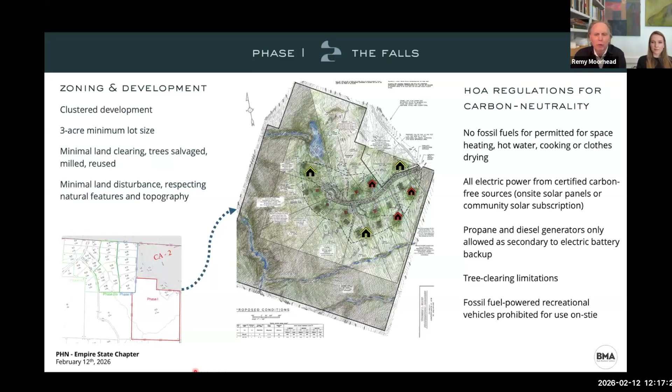Guiding principles for development of the land include retention of trees wherever possible and salvaging those trees, which need to be culled, for reuse wherever possible. The HOA establishes environmental mandates as well: no fossil fuels for heating, hot water, cooking, clothes drying, or recreation vehicles. All electric power, either solar or community solar subscription, and strict limits on tree clearing.

Early in project concept development, panelized construction was identified as a strong execution fit from a replicability and quality control standpoint. We are proud to have partnered with Bensonwood for these first 6 builds. The parameters of their system had a meaningful influence on our design process. We studied their plans and typical wall and roof sections to understand the kit of parts which would drive our designs. We developed new plans, sections, and elevations that worked within those parameters while reflecting our project design goals.

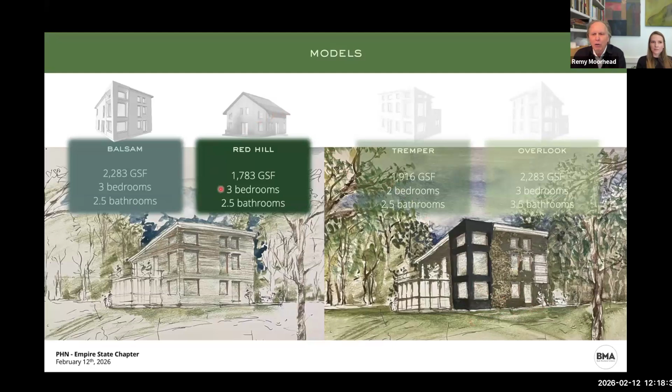Over the course of the project, we have designed 4 total models, all under 2,300 square feet. The design prompt from the client was modern rustic. The balsam, the watercolor on the lower right, became our first build. We turned more toward a contemporary take on the vernacular farmhouse for our newest model, the Red Hill, second from the upper left.

This is the balsam. As noted, this was our first build, originally constructed as a model home. This has been certified by PHI as a Passive House low-energy building. The balsam is 2,300 gross square feet, south-oriented, utilizes integrated passive shading by way of a feature corner, plus fixed shading over south windows.

As a Zehnder Q350 ERV system, it was designed initially with a 1.5-ton single-zone Fujitsu air source heat pump. During construction, our duct pressurization test for this system was fine. However, at completion, after the chipboard install, our balancing test showed significant drop at CFM at several rooms below the design calcs, what we think might have been related to unexpected friction loss in the ducts. We subsequently added the 1.5-ton supplemental unit.

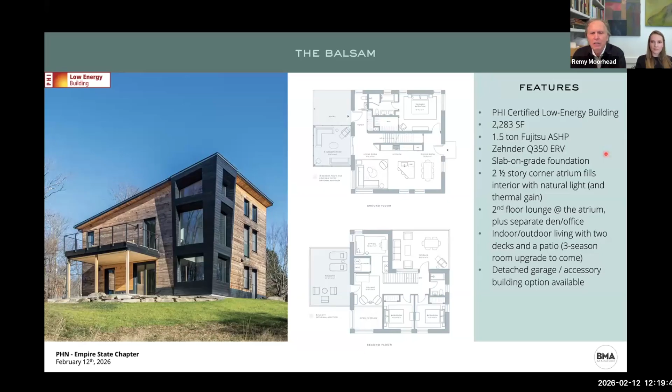We have completed 2 additional balsam builds to date for buyers. A couple changes from the model home: we went to a 2-ton single-zone HVAC system. This allowed for a buffer in case there were greater friction losses than anticipated, and in addition, simply provided some greater capacity. We moved the machine into a more serviceable location and put in a manual damper, allowing one to direct greater airflow to the upper or lower floor based on the season.

We added humidification to each house as well. We had experienced very low humidity, around 11% in the model home, unoccupied, that led to a severe gapping in our wood flooring.

An homage to the vernacular farmhouse, our newest model, the Red Hill, was developed in response to rising construction costs and our desire to have a less expensive offering.

It seeks to integrate as many learnings from our balsam builds as possible. Sitting at under 1,800 square feet, it is a compact square plan, efficient in its material use, while maintaining a marketable 3-bedroom, 2.5 bath layout similar to the balsam, with the primary suite on the first floor. The house is designed to receive solar panels on the south-facing roof.

There's an attached carport, and it has the same option as at the balsam to add a 3-season room with an upper deck. Heating and cooling is provided by 2 1-ton heat pump systems, one at each level with separate thermostats. This design uses ICF frost walls in lieu of the slab-on-grade warm form foundation at the balsams.

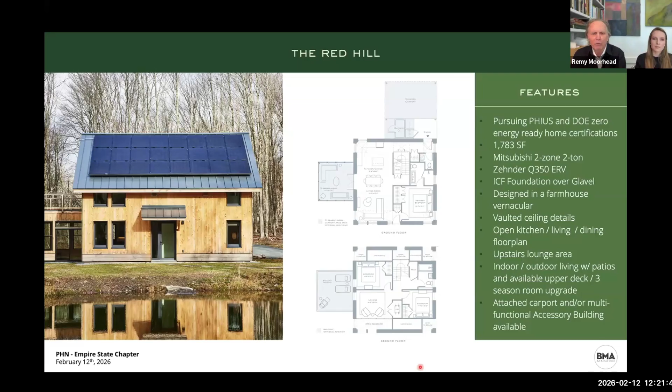The Red Hill was modeled in both PHI and PHIUS standards, and a decision was made to pursue certification through the PHIUS prescriptive path. We're at the latter stages of construction for the Red Hill that we are certifying through that pathway.

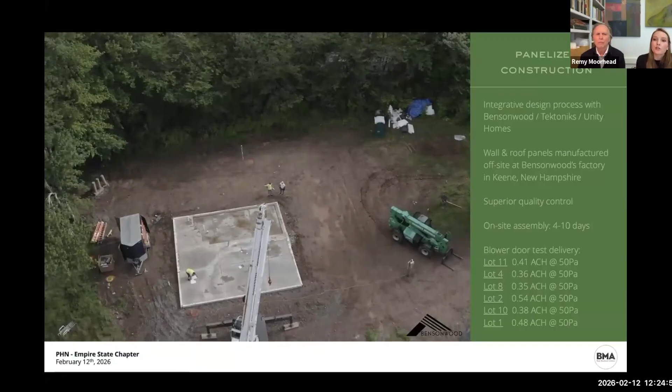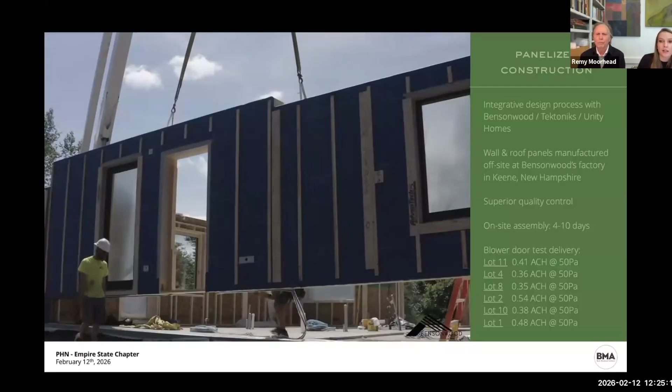The construction of these houses comes together in a pinch on site. It's really quite remarkable. The wall and roof panels manufactured at Bensonwood's factory in Keene, New Hampshire, come over on a flatbed truck, and then they're assembled in a matter of days.

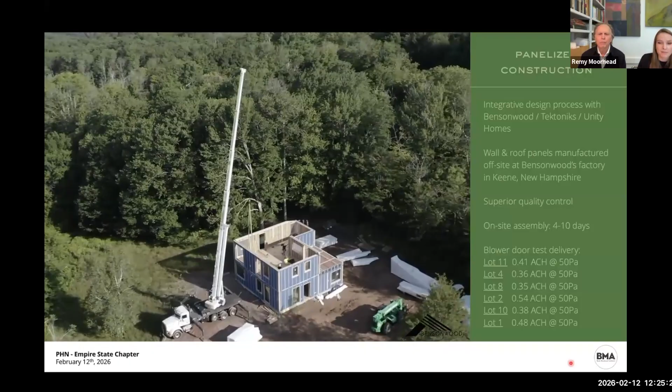Bensonwood, importantly, delivers a passive house level blower door test result as part of their contract with us before they leave the site. Rough-in MEP and the subsequent interior and exterior finishing of these houses is then executed by direct subcontractors to the Catskill project.

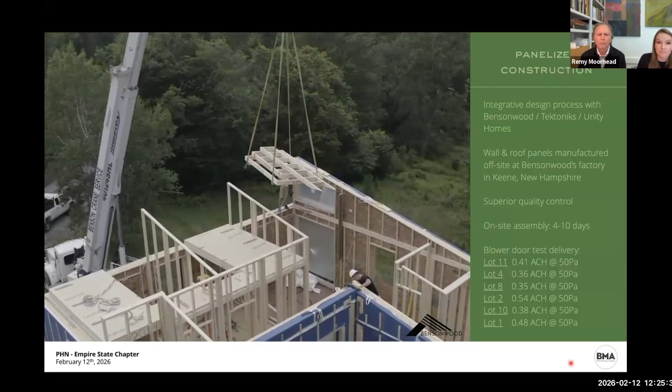Whenever possible so far, we have made it a mission to track the performance data of these completed passive houses. This case study that you're looking at here took place at our first balsam build.

Our mechanical engineer, Kramer Silkworth at Baukraft, set up a series of temperature and humidity sensors, and we then proceeded to turn off the heat for 7 days in the dead of winter.

I'd like to say that we weren't surprised by the results, given that we've been spreading high performance and passive house gospel for over a decade now, but with a validation like this one, we were.

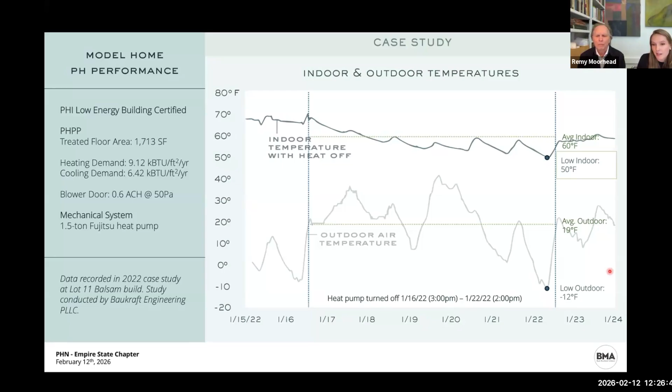Over 7 days with 3 nights of sub-zero temperatures as low as -12, the interior temperature of the balsam never once fell below 50 degrees overnight, and each day, even in overcast conditions, it in fact climbed back up to 60 degrees. This served as a remarkable proof of concept from a resiliency standpoint in a region prone to weather-related power outages.

We've also collected feedback from some of our existing homeowners to better understand the real-time performance of the houses that are now occupied. One homeowner has been tracking their energy use and solar generation, and since move-in in 2024, they have consistently seen more power generated than they have consumed.

Another homeowner pays only the cost to carry their NYSEG electric account for 9 months out of the year. Our third homeowner, who Buck mentioned happens to be a partner in the development, is also sitting in on this meeting, so we can pick his brain after. He installed his panels more recently, back in April of 2025, so he doesn't have a full year of data yet, but he suspects he's tracking towards less annual production than his neighbors, likely due to tree coverage on the site.

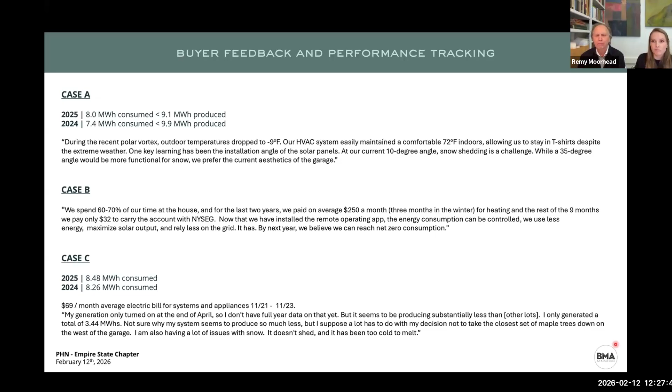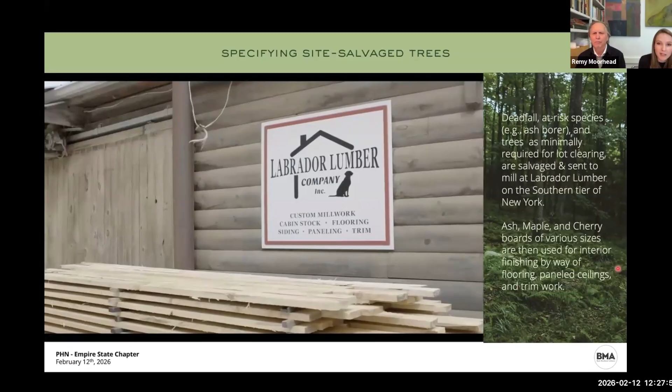We've made strides to think beyond the bounds of operational energy alone at this project, and begun to think, specify, and source critically to minimize the embodied carbon of our construction as well.

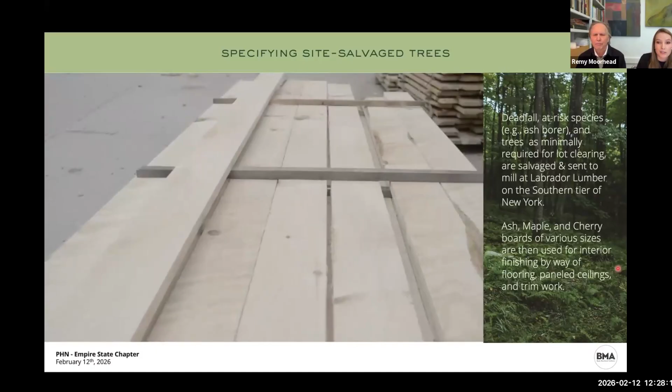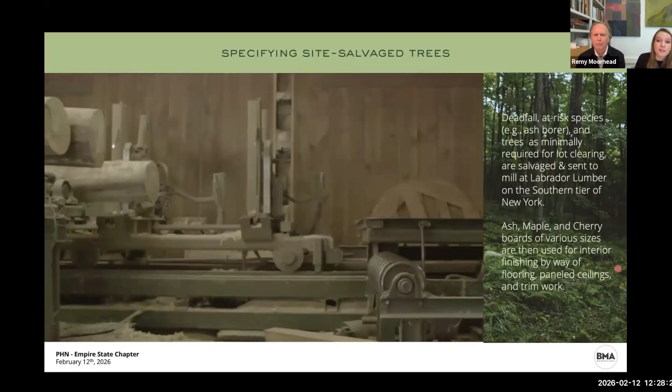One commitment the project has made to this end has been to salvage, mill, and reuse deadfall, at-risk species, and trees fallen for house siting. You see here in this video trees from our site sent to mill at Labrador Lumber on the southern tier of New York. Ash, maple, and cherry are dried and milled so they can ultimately see a new life as finished flooring, trim, and wood ceiling panels in the houses. There is something special about being in a space that is, by way of form or material, in direct dialogue with its surrounding environment.

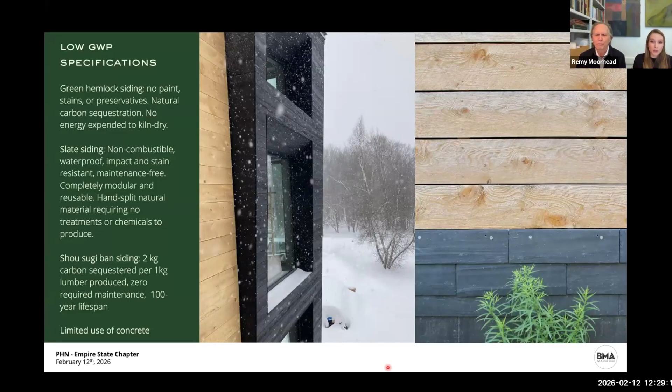Here's a list of some additional material selections we've made with circular economies and low global warming potential in mind. We utilize locally sourced native hemlock siding to clad these houses, reusable slate tiles at the building skirts which are designed to be dismantled and reused at end of life. We are also very careful in our use of concrete, pursuing slab on grade construction wherever possible, and we specify dense packed cellulose instead of foam insulation.

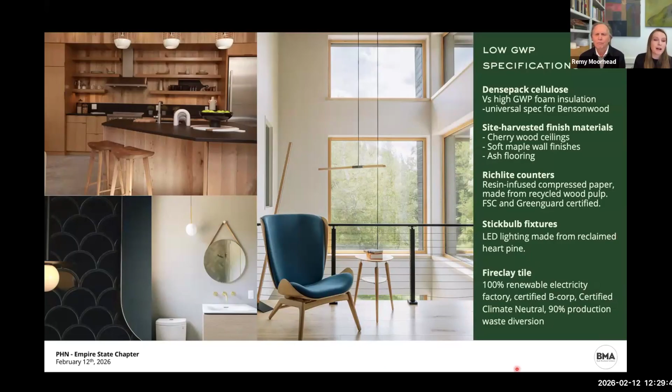In terms of interior finishing, we've had great success with Richlite countertops, a recycled wood pulp material that's FSC and Greenguard certified. We've also been pretty loyal to Fireclay Tile - they're certified climate neutral, manufactured domestically, 90% waste diversion, and I believe their factories are powered by 100% renewables as well.

So for future builds, there's lots to consider. We'd certainly like to further close the gap between our tracked embodied carbon so far - we've used the EC3 tool for preliminary estimating there - and what's ultimately achievable for the project. Addressing operational carbon through high performance building design is thankfully becoming increasingly an industry norm and considered a basic requirement for good architecture. The mindful reduction of embodied carbon in materials and construction processes is certainly next in line for the throne of critical importance.

We've also included here some considerations for our future builds as our design offering continues to evolve. We are currently, based on the most recent weather we've been experiencing in the Northeast, investigating the addition of a supplemental electric resistance heat system to the air source heat pump for times of extreme cold where the system just can't hold temperature at the set of the thermostat.

We are thinking through the potential use of a thermal battery, which we learned about through a Passive House Network webinar recently. We're also studying the impact that snow buildup has on the efficiency of PV panels through the winter.

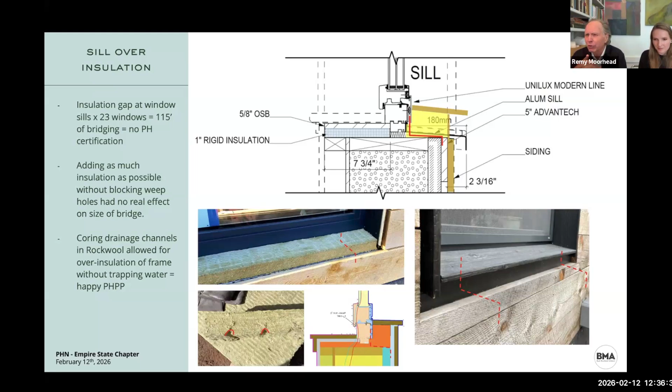They delivered and erected the three Red Hills. So it's been going on, and we've been working on it for months beforehand, but it was a great example of the benefit of panelized construction, because it was very cold, but they could erect these houses insulated with the windows in place, and the contractor could work the next day with a little heater in it and be good to go. We had three of them going at the same time, and the last one is just about finished.

So we probably have a lot of pricing data on the Red Hill, which I'll pass on to Greg if he'd like to say anything regarding that cost question.

Thanks, Buck, and hi everybody. Yeah, so it's a little hard to pinpoint because things are different on the different houses. If you're doing cost per square foot, the way I think about it—and it's great we have this picture up here—I try to isolate the cost of the carport, the elevated deck, and the three-season room below, and take those out of consideration to get a price per square foot of the basic house, which is 1,783 square feet or something like that. With those things in mind, we came out between $450 and $500 per square foot.

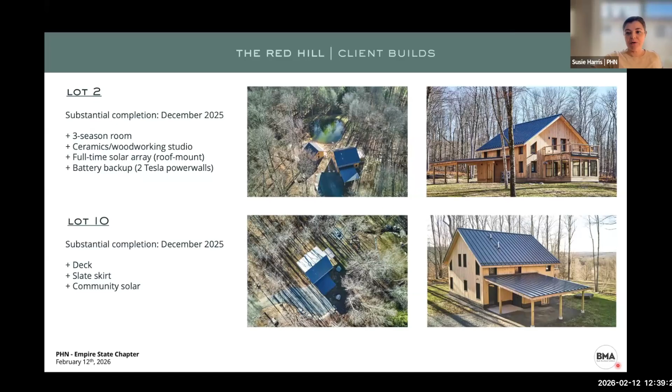Awesome. Are you able to elaborate on the interaction with Unity? They proposed assemblies and a 2x2 grid, and you customized within that format. Were there constraints that limited you?

I'm happy to elaborate on that. So we decided we were going to partner specifically with Bensonwood super early in the process, so our design process definitely benefited from an early understanding of what their constraints were.

If you're doing a fully custom design with them, their constraints are very limited. They do operate on a 2x2 window grid. We told them we wanted to build these as affordably as possible and stay as far away from a custom build price as we could, so they directed us to their Unity Home kit of parts package.

They have a lot of different design offerings, and essentially said, have a look at these, pick a few and see if there are adjustments you can make to customize a Unity while maintaining what was important, that 2x2 grid as it applied to building footprint and door openings, and wherever possible utilize their standard bathroom sizes and layouts. I'm not sure how close to those we ultimately stayed, but maybe close.

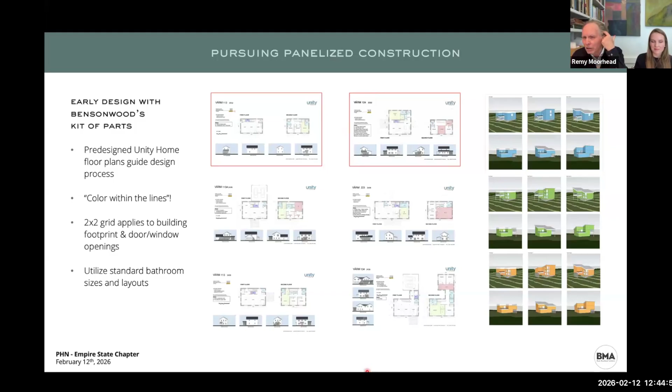You've got the framing and wood flooring costs on top of that stem wall. Pouring a slab, a thickened haunch slab, is what our contractor confirmed was the least expensive thing we could do when working on the model. So we've done it, and our buyers love the concrete slab. In a passive house that's insulated well, they're not cold, and there's no radiant floor in it either, so it's comfortable. I wish we could bring slabless into our thinking for our next houses.

Yeah, it would take it. I don't know if it'd take down costs necessarily—probably would—but it certainly would remove the concrete and embodied energy that we're fighting with the slab.

And the second part of your question was what type of wall assembly we'd be pursuing for a stick build option. We're still in the process of making that determination. If any of the attendees feel like they've cracked the code on the most cost-effective way to stick build passive house, we'd be interested in hearing it. Our first instinct is a staggered double stud assembly, but I'll throw that question back out to the group.

We have a challenge because in considering it, we have to deliver the exact same house that we have, the Balsam or the Red Hill, but it's got to meet the same passive house characteristics. So we actually have to reverse model something to that specific plan, form, and window layout. Anyway, it's a good question from Remy there.

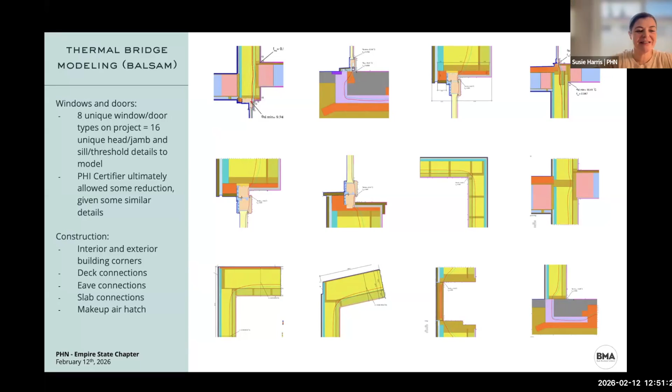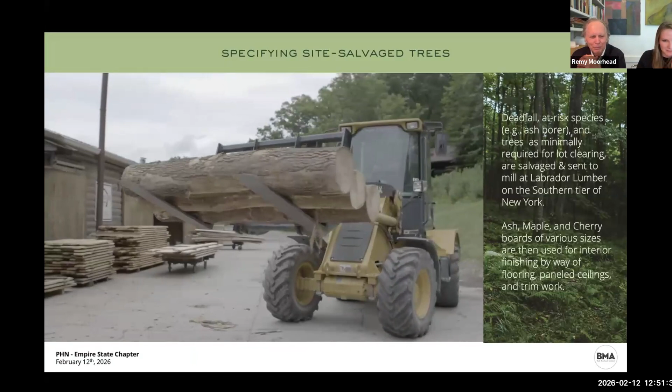There's a lot of questions about the insulation under the slab. The rigid - we're talking foam. That's foam. We don't love it either. Are there specific questions? Are we right in our instinct that folks aren't loving the fact that there's EPS there? Or is there another question related to it? Feel free to just unmute.

How many inches of EPS did you have to put in? And did you place geofoam underneath the footer of your monolithic slab?

What you're looking at here is a product called Warm Form. That's what's forming the thickened haunch at the slab. If I recall, this is 6 inches at the slab edge, and then each of these pieces of rigid insulation, which would have been EPS, are 4 inches each.

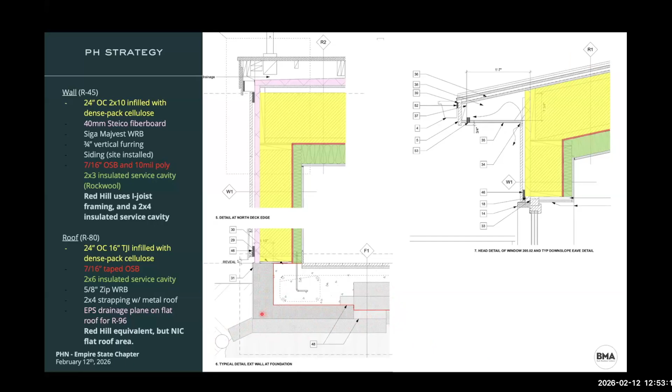So we have a fair amount of foam buildup here, but your second question was about geofoam underneath—would that be at the wing insulation? The ASTM spec for geofoam means it has less compressibility than regular EPS, so I have a feeling the Warm Form, at least where the concrete is setting, is geofoam. It's type 9, with a much higher PSI capacity on the perimeter, and under our interior bearing wall it changes from type 9 to type 2 or something under the slab.

Someone brought up foam glass that Greg is using now—do you want to discuss that a little? Oh yeah, we love that idea. We haven't used it, though—we didn't at the time the first balsam was built. I don't know if foam glass was available then. It probably was, but anyway, we didn't use it.

We have used it with the Red Hill project. Our contractor wanted to try a stem wall application with ICF, but we needed continuous insulation under the whole foundation, even with the stem walls. We found the only way to do that was using Aero Aggregates, out of Pennsylvania—not gravel, but similar material. So we went continuously under the whole foundation and connected it effectively with the ICF system to get continuity under the whole foundation.

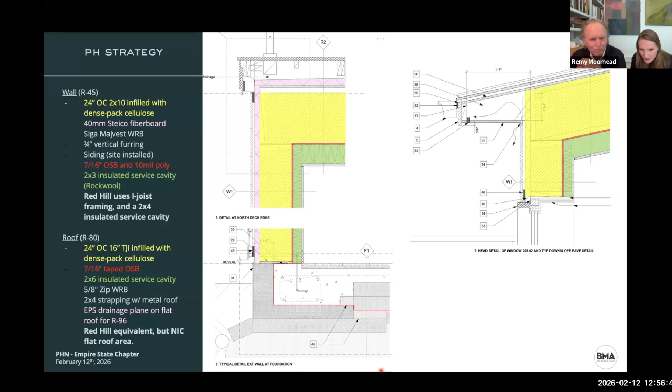How did you achieve continuous insulation under the exterior door openings? Such a good question. We cut that slide from our presentation, although it's still here—can I unhide it? Let's see.

Can you guys see that? Can you see the slab door detail? I don't know that I can unhide it live. But it's two different approaches depending on whether it's the slab on grade foundation or ICF. The long and short of it is that it's finicky.

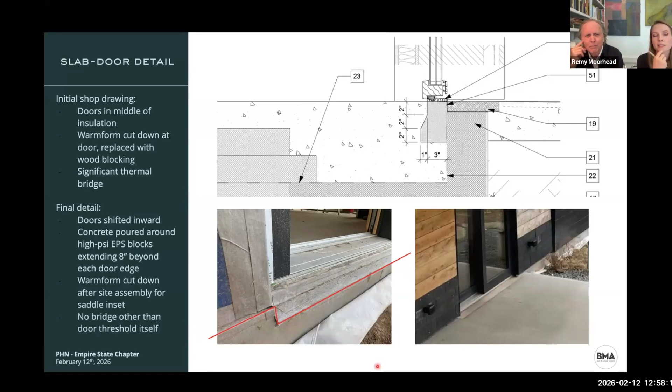We cut a notch into the slab. We put in a spacer, like a wood block, under the door, extending about 8 inches outboard in both directions. When we poured the slab, we then took that out and put in Armatherm, which is a super high compressive strength rigid insulation. So we essentially notched into the slab high compressive strength rigid insulation, and that's continuous to the insulation on the perimeter of the slab. It's a similar concept for the ICF—the concept is the same, but the execution is a little different.